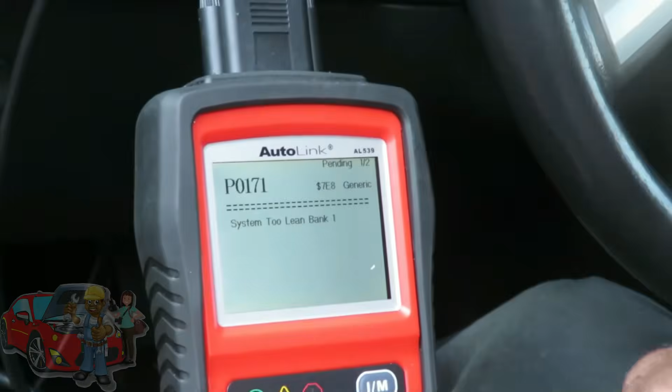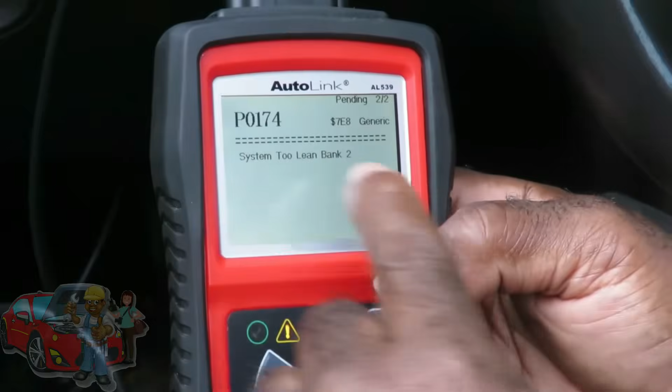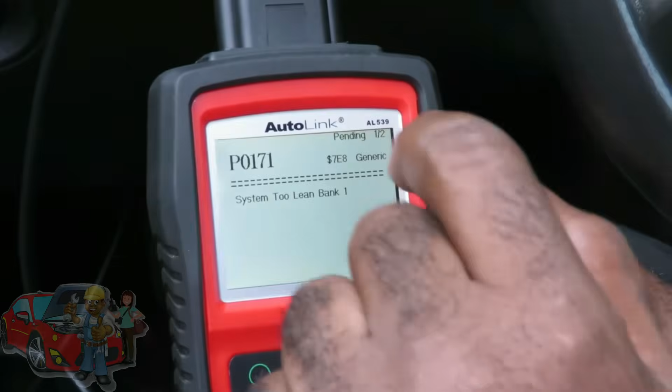We got a P0171, one of two, and a P0174. P0174 is System Too Lean Bank 2, and 171 is System Too Lean Bank 1. Alright guys, I'm going to quickly go over this and explain to you where these codes come from, why they happen, and what we need to do to fix this. Alright, we'll be right back.

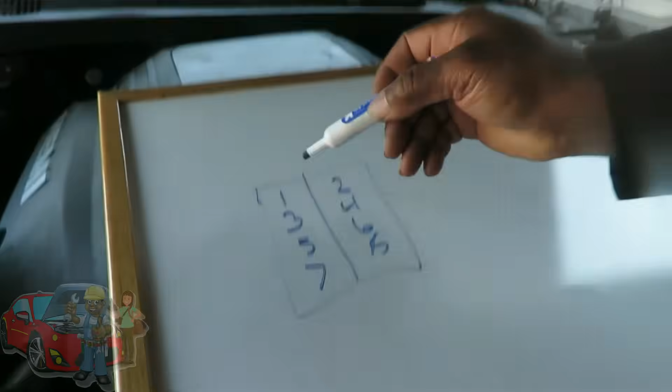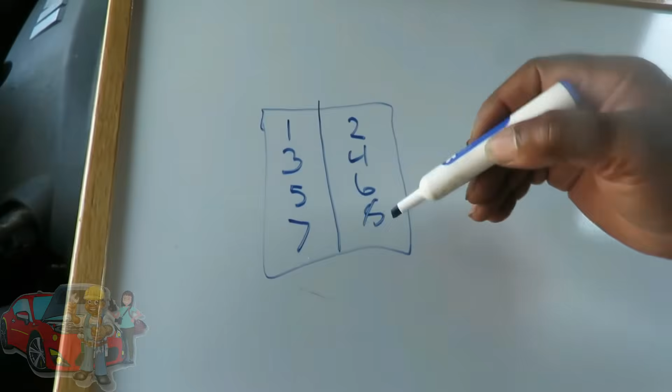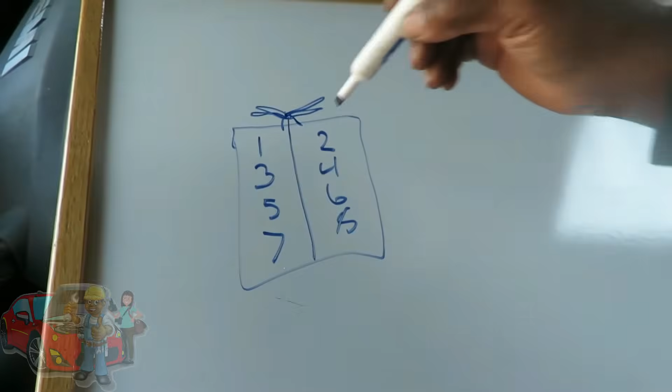Alright guys, what I'm showing you right here is a picture of an engine. This is one side, cylinders 1, 3, 5, and 7. And this side is 2, 4, 6, 8. Matter of fact, to make this legit, let's put a fan on the front. That looks good, like a flower though, and that's for the front of the engine. So this side is considered bank 1, and this side is considered bank 2.

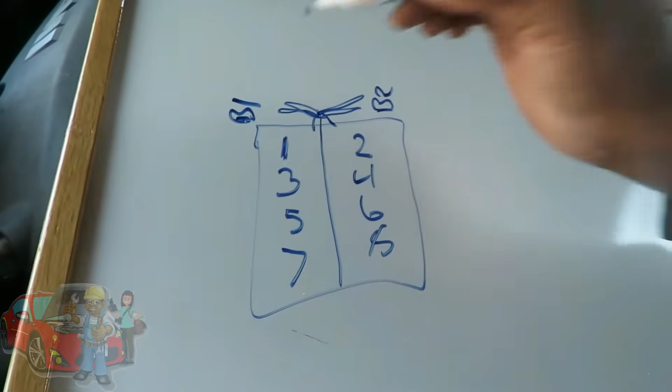Now let's see what happens. Now, is that the way it is on this engine? Well, I'm not sure which side is bank 1 and bank 2, but this is for your explanation. That's wherever cylinder 1 is, that's bank 1. So if cylinder 1 is on this side, this will be bank 1.

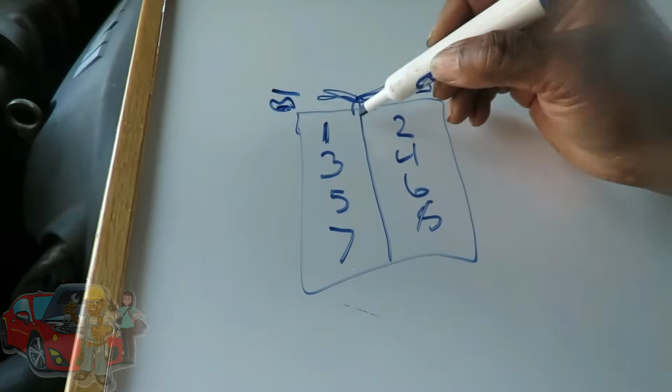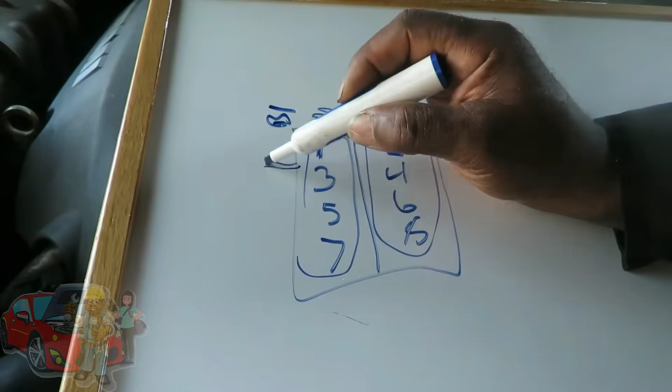Alright, let's see how we're going to explain this real quick, guys. Make this look good. Alright, now on this engine you got your intake manifold, you got your oil dipstick tube, you got your valve cover gaskets, and all that. All that should be sealed off. And actually, some of you guys, if you notice, if you pull out your dipstick, you're going to see a little O-ring right there. That's to stop air from coming out of there, because that can contribute to 171 or 174.

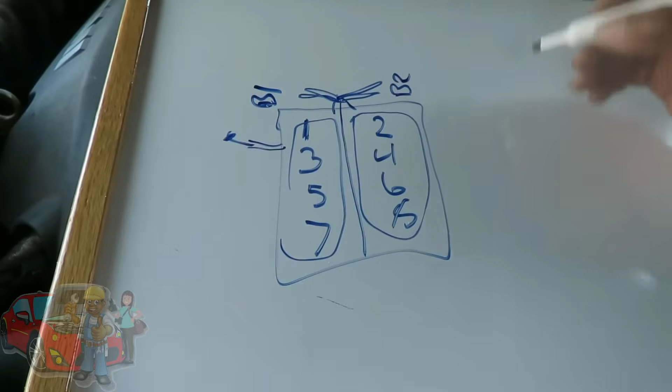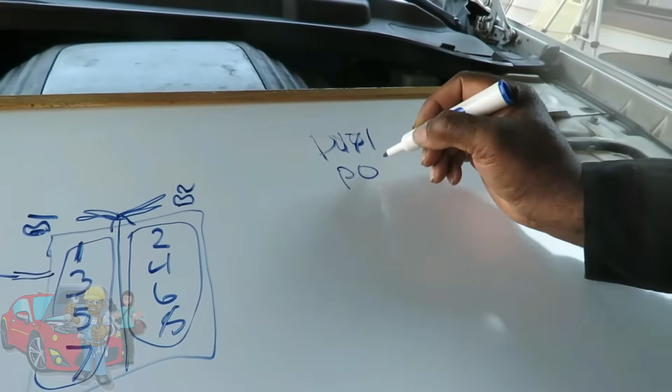Now, 174, that's right. So if you got a P0171... I'll make this one better.

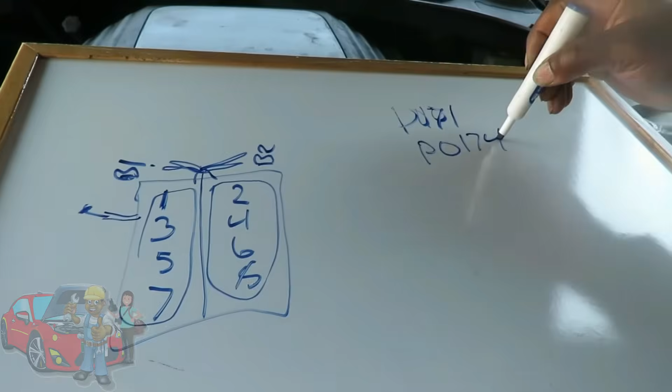171 is a leak coming from bank 1, and 174 is a leak coming from bank 2. When you get both of them together, that means you got a leak somewhere that's affecting both banks.

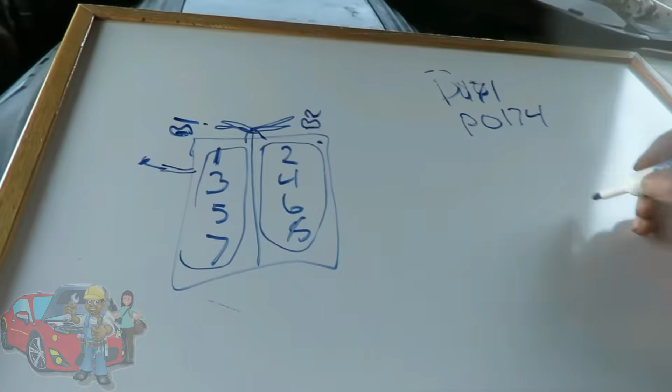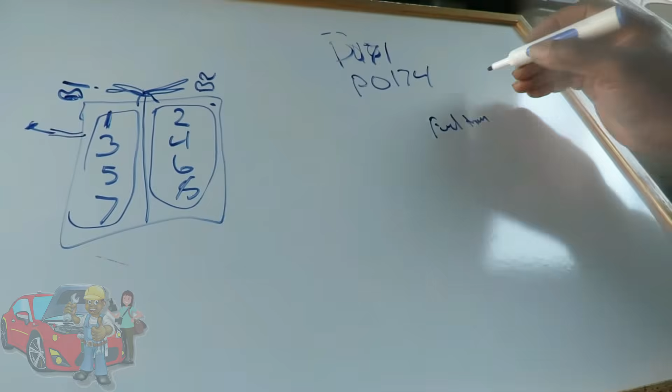Now, what does this mean? Your computer has what's called fuel trim. Don't even worry about the name of it, but what it does is monitor how much air and gas is coming into the engine, and the computer compensates for it. It tries to keep both of them, the fuel and air, at the same level.

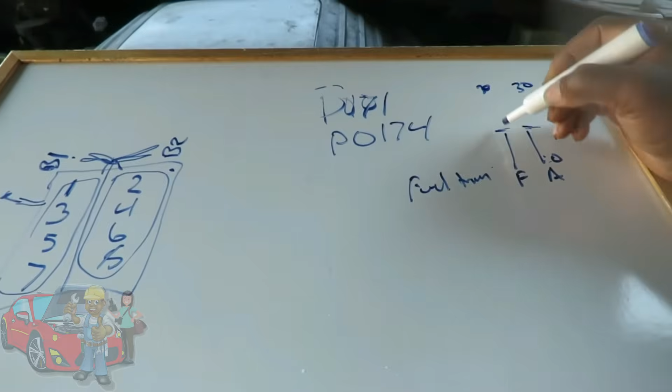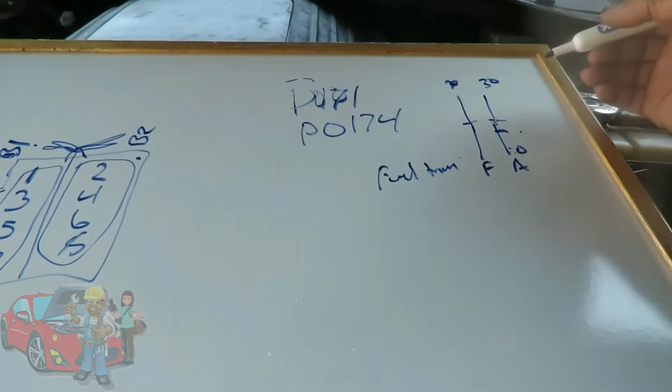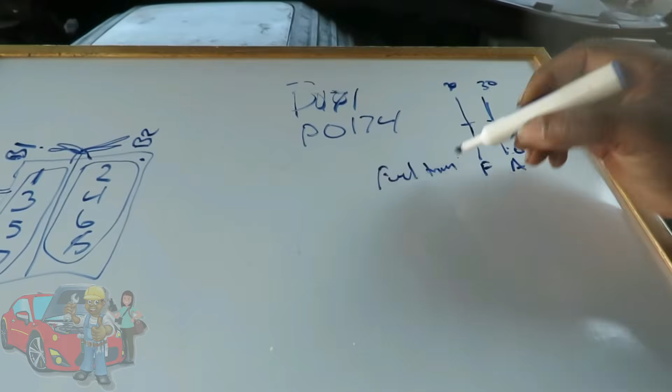Now, if you have an air leak over here, let's say if this one is running from 0 to 30, and this one's running from 0 to 30, and let's say at idle it's measuring right here. As you get an air leak, say if you pull out the dipstick or have a valve cover gasket leak or a leak on the intake manifold, you got more air coming in. So now that meter rises. So what the computer does is give the car more fuel to keep them even. 30 is the limit.

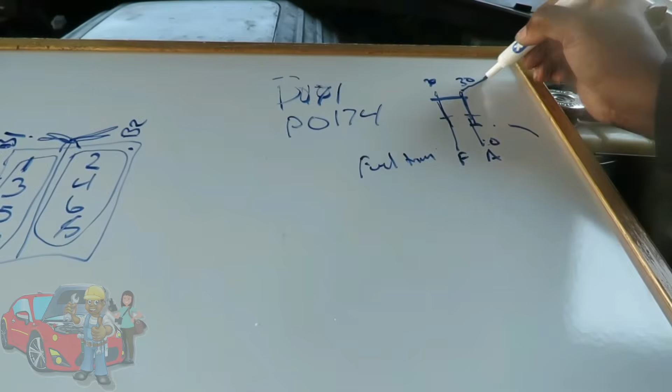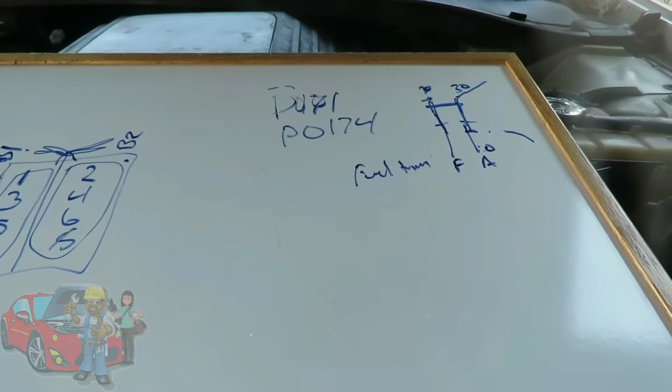So if you got an air leak that's going past this 30 mark, the computer comes up, but it can only go up to 30. And it says, wait a minute, I still cannot get this to even out. Bam, we're going to trigger that code. Any questions on that? No.

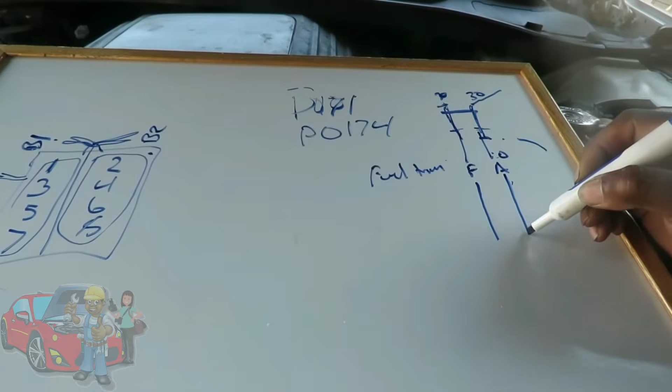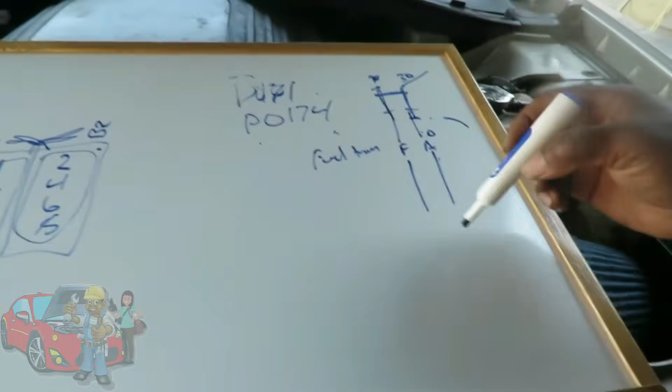All right, now you got the other way, guys. Going the other way is, I think it's 172. 172 and 175 or 176, I don't know, which is going the other way. If it senses not enough air or too much fuel, it tries to equal it out by the air. Then you get a different code.

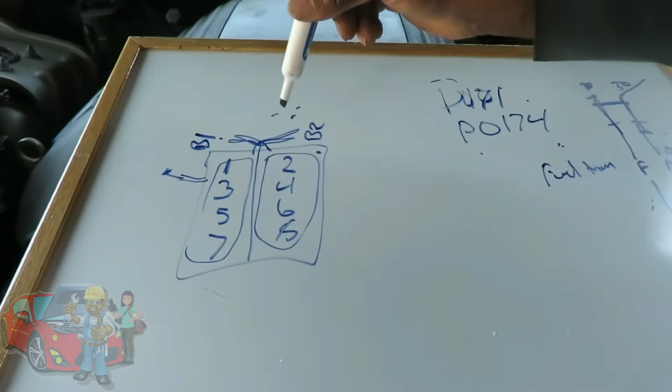So our thing is, now we have a problem with both cylinders here. That means we got so much air coming in from somewhere, it could be a vacuum leak, something. So much air is coming in through this engine that the computer can no longer compensate. So the first thing we want to do is take off the cover and do a visual inspection. Get this out of the way, we're going to pop this cover off.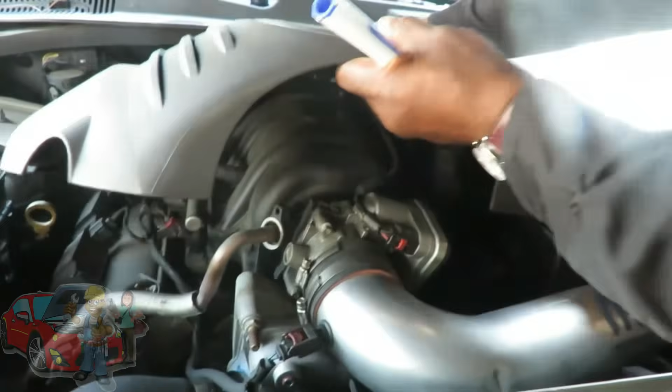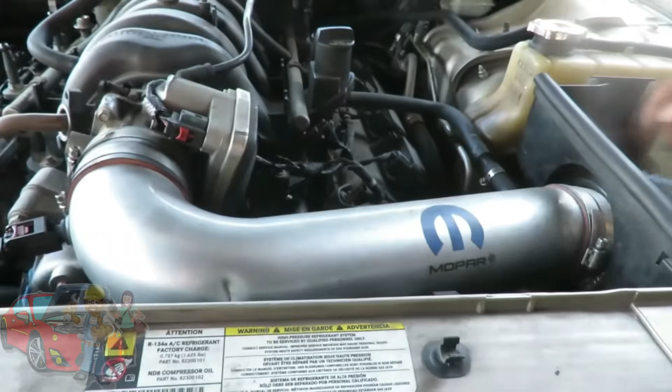What we're going to do is go around and find air leaking anywhere. Now, if this one had a mass airflow sensor in between here, you would want to check any kind of air leak from this point going to the engine. This one doesn't, so even though this is off right here, that's not going to cause a problem. It's got to be a leak from here on out. So how do you find an air leak?

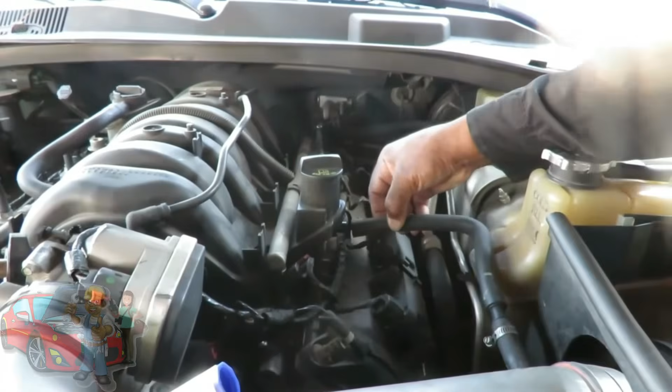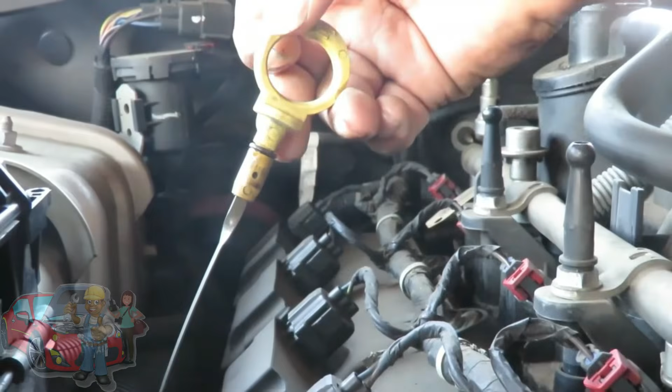Sometimes it's very easy. What you got to do is go around and check all the hoses. That's a little bit loose, but that's not really going to cause it too much. And here's the oil dipstick, and that one wasn't really pushed in all the way. Actually, there it is, like I was telling you about. See a little O-ring right there? If that O-ring is dry rotted or broken or off, you're going to get an air leak coming in, which the computer's going to try to compensate for. But that wasn't in there all the way. Now it is. But will this affect both sides? Yeah, it's going down to the engine, but it would. So we're going to be looking for an air leak that's affecting both banks.

I have a question. Okay, oh no, never mind, never mind.

Okay, so the first thing we're going to do is grab a light, and we're going to look around and see if we can find some leaks. Let me grab a light, and I'll be right back.

All right guys, what's good about this engine is it doesn't have too many vacuum lines and all of it. The only thing I don't like about it, it's got a plastic intake manifold, and the gaskets sometimes suck. So the number one thing right here, in the back, we have our brake booster, and here's a main vacuum line that's going to the back of the plenum. You can't see it back here.

I'm just... oh, you might be able to see it on this side. You see where my hands are? Okay, it doesn't feel loose or anything, so that's good. Any kind of vacuum lines connected to this intake, we want to check, any kind of oil leaks, anything. And right now, that's kind of dry rotted. No, this is dry rotted, and I know if I move this it's going to break. So I'm just feeling around for any cracks, and I do not see anything.

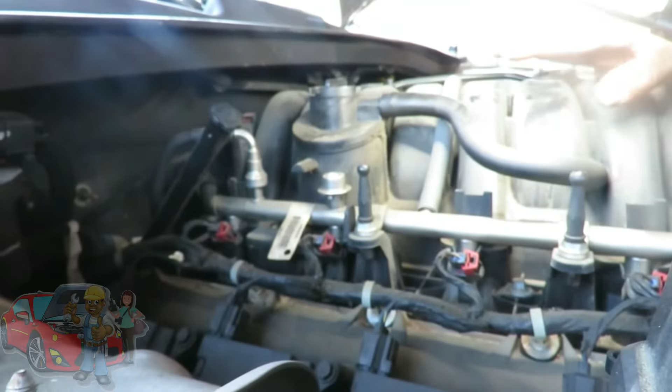Now this is where you come across a problem, guys, because for a DIYer, you're going to have to either take it to a repair shop to have them do a smoke test. And what that is, they'll blow smoke through the entire system, and any kind of leaks will come up. There's also cheaper ones that you can buy online. I heard of people actually making smoke machines at home, which is pretty cool. Wish I would have seen that before we spent the money on buying one.

All right, so we visually do not see any kind of leak. So what we're going to have to do is a smoke test. So let's get our smoke machine, get everything set up, and I'll show you what we're going to do, and we'll be right back. All right guys, let's get ready to hook this up.

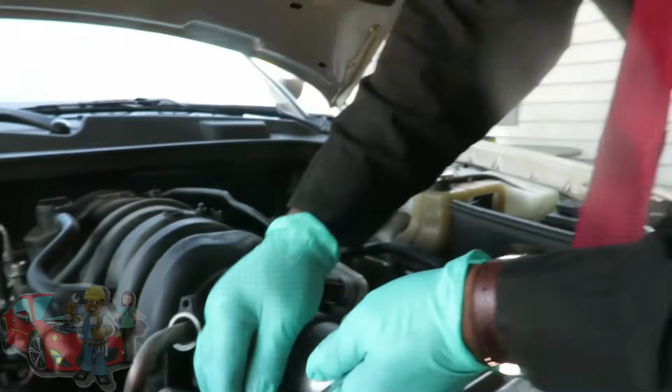First thing we need to do is get us a flat screwdriver. You know what, we're going to unplug our air temperature sensor. Loosen up this clamp. Take this off, because we need to block that off.

Wow. And we're gonna introduce our air through here. Man, that's kind of... we need to push that on, make sure it's tight before we do that.

Now, usually, a lot of times what I like to do is go through the brake booster. But sometimes your air leak can be coming from the brake booster, so that would kind of suck. So we're going to do it right from here.

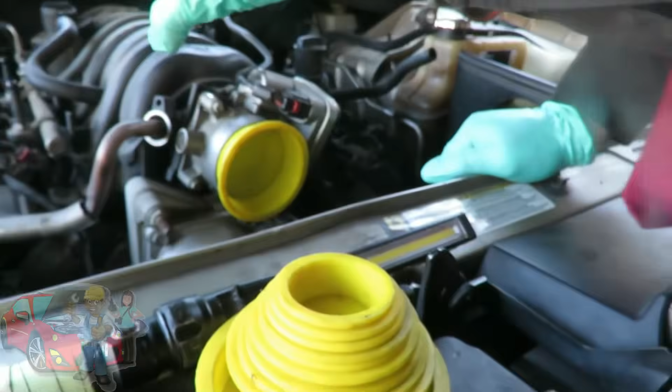Alright, we got our smoke machine over here. And what we're going to do, first we got to hook up our power, going to the battery of the vehicle. And then we got our caps here. We're going to find one that will plug up. Oh, that right there, that's good. And plug that off so air won't leak out of there. So let's get our machine hooked up, hook up our air line to it, and get ready to do a smoke test. We'll be right back.

Alright guys, let me explain to you how this is going to work. Here's our little nozzle that's going to shoot the smoke out, and here's our trigger button. Now once I hit it to trigger it, trigger button - see the smoke coming out of there?

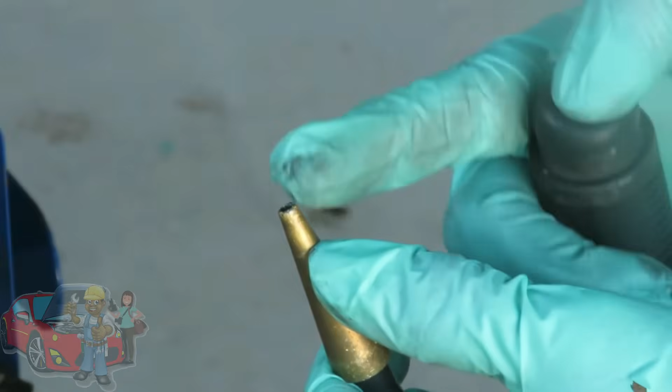Now what's going to happen is that this machine is going to blow this smoke all throughout the intake, and we're going to find out if there's a leak. We look for leaks from the smoke coming out.

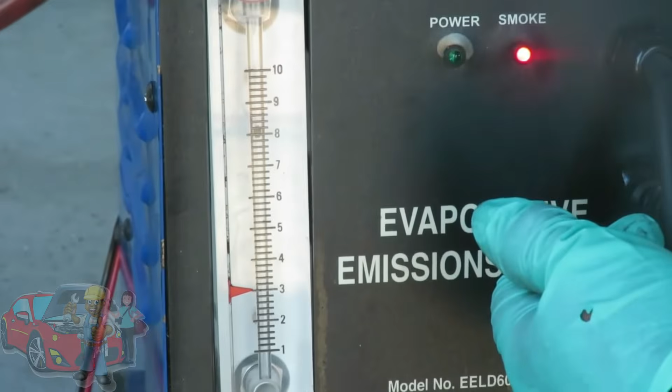Now, this machine has a little ball on it right there. So now we'll get this together. When I hit the button, notice the ball goes all the way to the top. As the leak closes, that ball starts dropping down. As I close my thumb off, all the way till there's no leak.

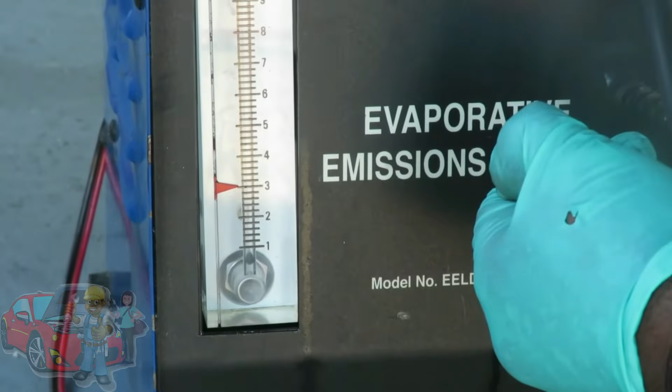Go back up. Alright, now that we got that, we're going to take this, stick it into this hose right here. We're going to make sure it's firmly into there. Let's get our trigger, and let's go over here. First we're going to go over here and watch the machine. Alright, so let's click it on.

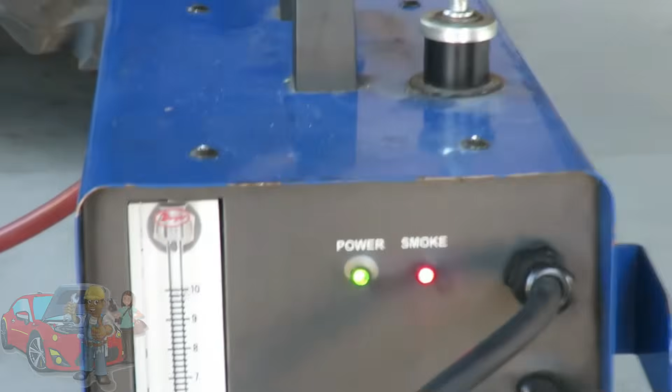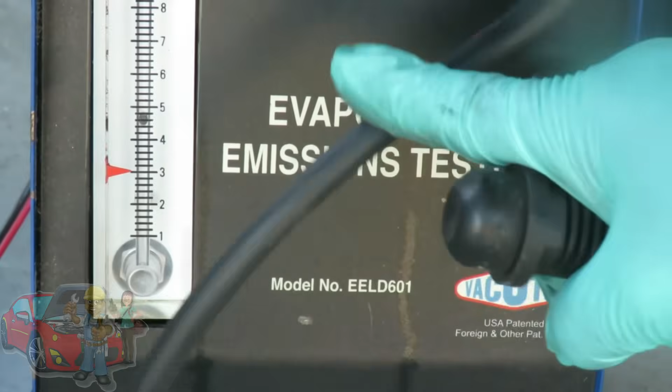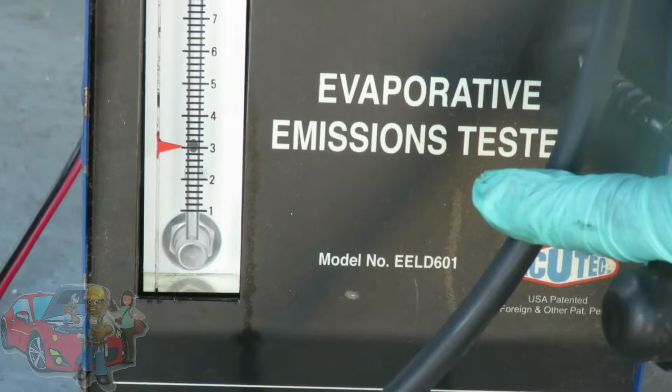And as the system builds up pressure, you can see that ball continuously drop down. And it looks like it's hanging out. Oh no, it's still going down. Is it hanging out there? Well, looks like it's still going down.

Let's go over here to the engine and look around. And we look for any kind of smoke coming from anywhere.

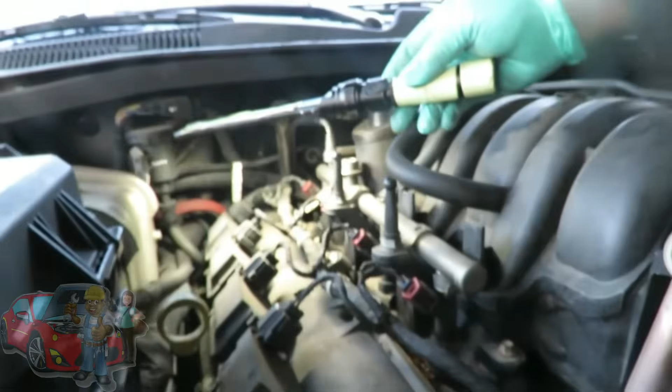Is it only gonna be under the hood? Can it be anywhere else in the car, or under the car? If there's like the evap system, if that wasn't working right, it would come out of there, but we would get an evap code. But we're not, and we're not seeing no smoke.

And this is, I'm gonna show you what I mean. But we're just gonna remove this cap. See that? So let's close that back up. And we're going to let the system build up pressure again.

Now, again, the funny thing about this is that when we first started, we noticed that our oil dipstick was not pushed down all the way, and that can cause a problem. Let's see.

No, I didn't. Now this is what I mean by the oil dipstick - the oil dipstick was partially up. So you see that? Now it was down there like that. But even down there like that, it's not leaking. I'm going to see if it does - see if it builds up pressure.

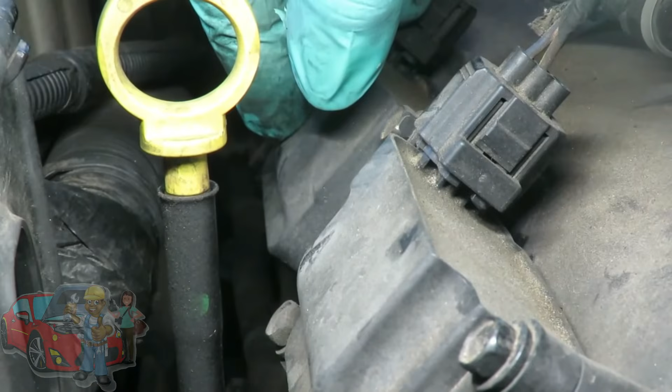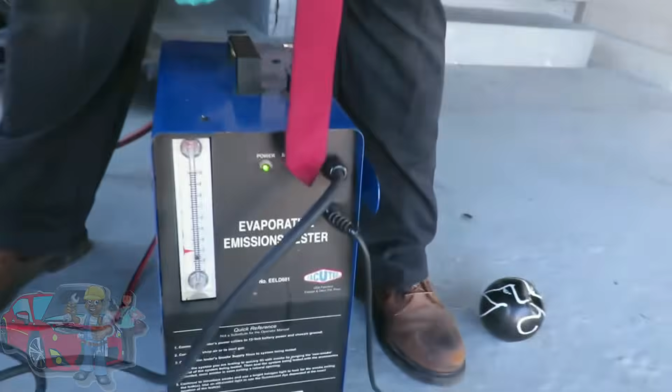Let's go check out where our machine is at. Hanging on about 3. It's tiny, it's a small leak somewhere. So we just gotta let the machine stay up here until we can find something. We'll be right back.

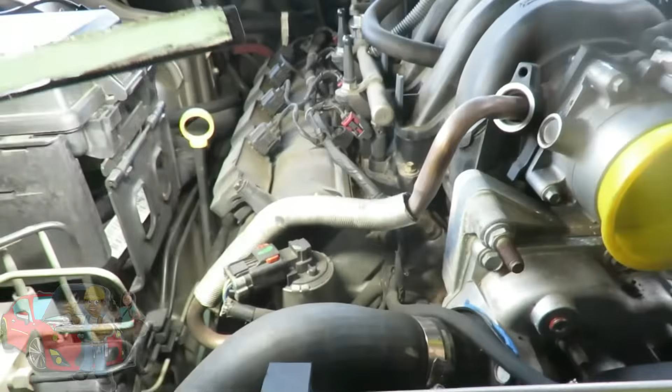Alright guys, look at this. Look at all this smoke coming out, and it's coming from the EGR valve. The EGR valve has a diaphragm and a pintle inside that should be closed right now. No air should be leaking whatsoever. And because of this, the engine should have a little rough running condition as well. This is a major vacuum leak right here.

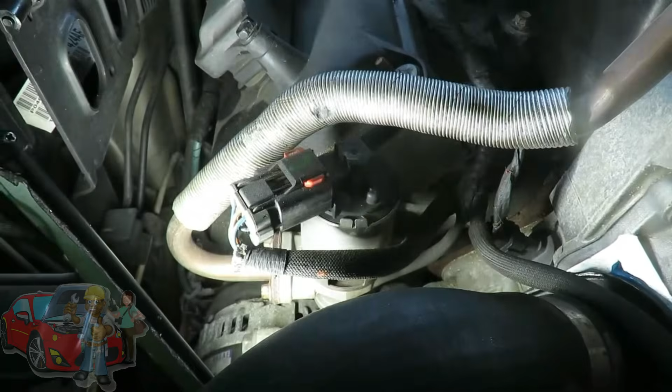And actually our meter went down to 2 and then it just started coming back up right now. Let's look at our meter - that's high.

So we know we got a leak at the EGR, that's one. Now what we're gonna do is go beyond the call of duty here. I'm gonna take off those two bolts, disconnect this line, and try to plug this line up so we can eliminate the EGR valve and continue on with the smoke test. We'll be right back.

Alright guys, first let's unplug it. Got this little safety tab right here, we just gotta back that tab up. Just like that, squeeze the connector, the little tab in towards the connector, and unplug it. Get it out of the way.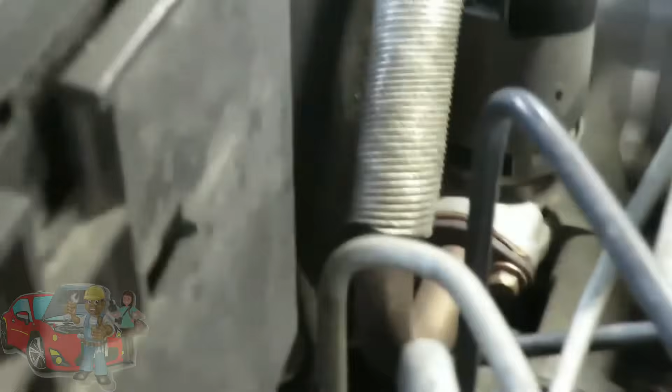Now, it looks like it's held on by two 8mm or 5/16 bolts. I'm going to use an 8mm deep 1/4 inch drive, and go in here. Get this bolt out first since it's the hardest one, then I'll go over to the other bolt.

Be right back. Alright guys, we're taking out the second bolt. You'll notice there's a gasket between there, so we want to make sure we don't drop that gasket.

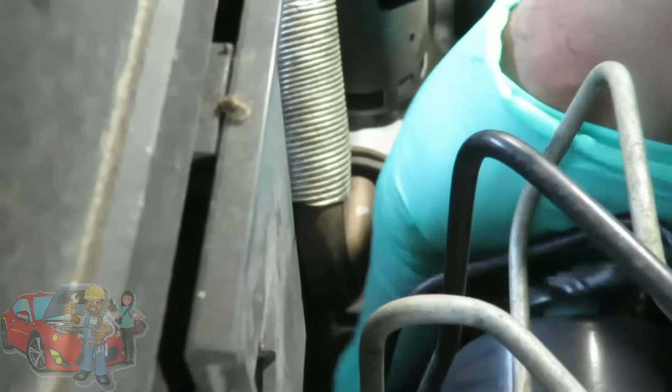Of course I'm going to drop the gasket. Watch.

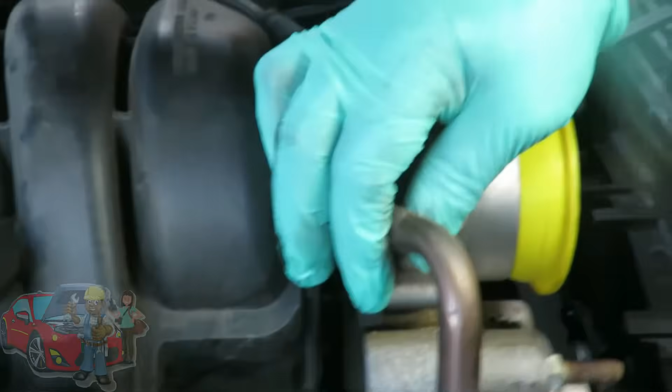Okay, now up here it just pulls out of the plenum. Oof, what is up with that? It's carbon, and there's our smoke coming out.

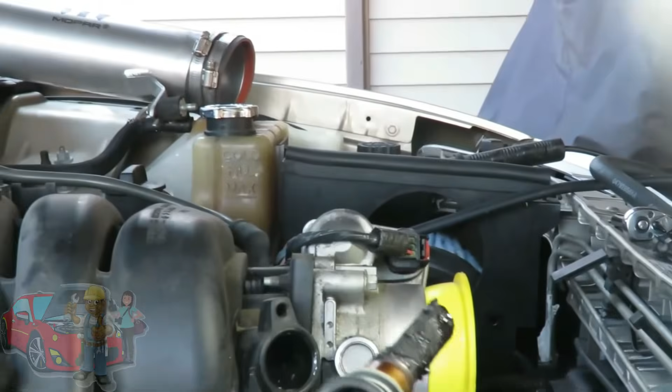Now what we're gonna do here, guys, let's keep this out of the scenario, and we're gonna get something to try to plug up into there. So let's find something and we'll be right back. Alright guys,

Siri recommended we use this piece. That was cool, see how she's thinking? I like that, I like to have somebody working with me that can think. So what we're going to do is... too bad Billy Bob's coming back.

Yeah, we'll wedge that in there, and we got the end of it plugged off. And let's hit the machine, see if...

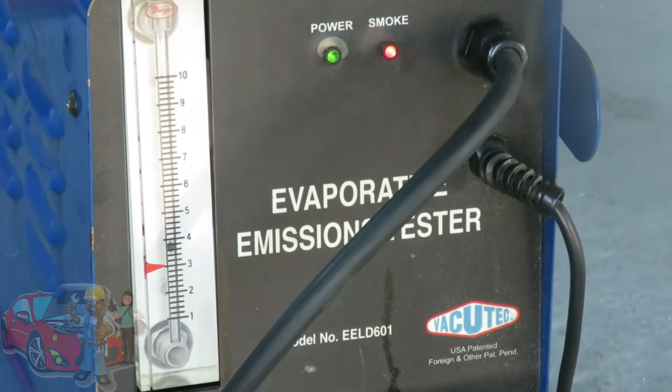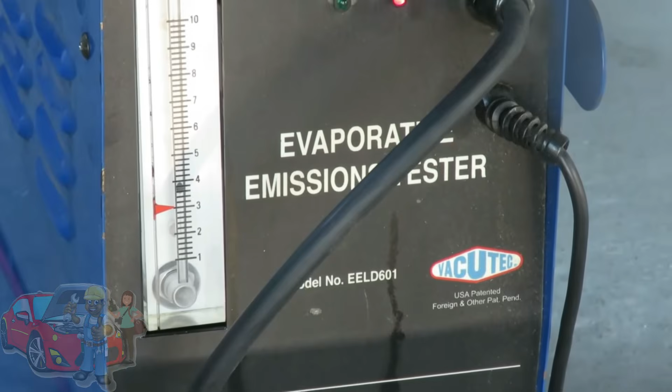Looks like we still got something going on here. Let's go up here and look around. So we're going to let this run now for a little while and try to locate another leak.

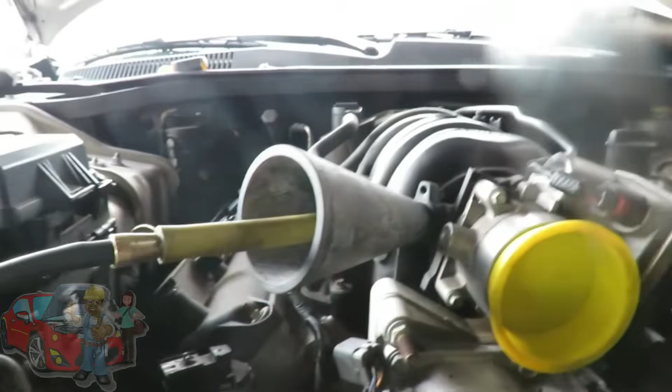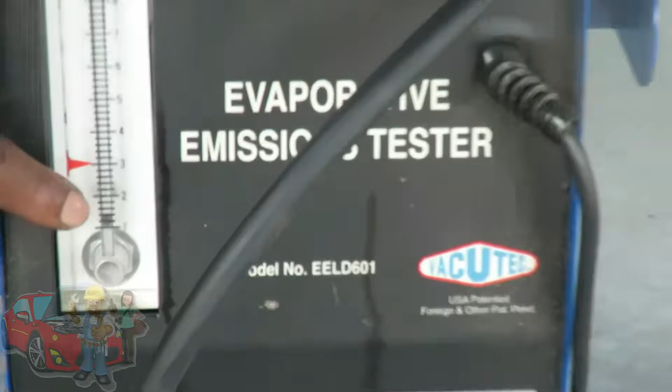We'll be right back. Alright guys, we had a little mistake a minute ago. We had taken the adapter out and put a spark plug in here because it was leaking through here, but we couldn't see it, and this thing was bothering the mess out of us. So we stuck a spark plug in here, and we still got an adapter hooked up into here. And as you can see now, we're way down there, look at that. No leaks whatsoever, and that's with the EGR valve out.

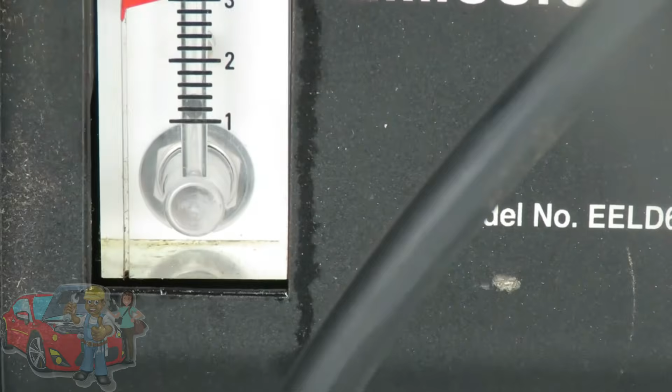So what we're going to do now, we're going to put the EGR valve back in and retest this and see if it comes up. We'll be right back. Alright guys, we got it going back in. It's kind of windy out here.

Now here's the weird part. We saw in the beginning this thing was smoking like crazy out of here. I don't know if it's because when I put this together, I hit it and the pintle opens. Some of you guys know what I'm talking about. The pintle opened all the way or something, maybe it was jammed up a little bit. But look at this.

There's hardly any smoke coming out of here now, and trying to see if we see some. We saw a little bit, I see a little bit.

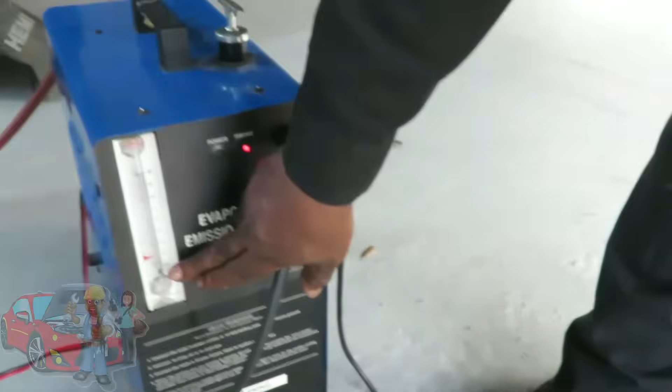But if we go over here and look at the machine, look where we're at, we are way down there. And we know, we saw in the video, that it was leaking out of here a lot. So as I said, maybe when I was taking this off, maybe because I was up against it and hit it, the pintle was open a little bit or something, or whatever, or I have no idea, but it was smoking like crazy. And look at that, it is hardly any smoke coming out there at all.

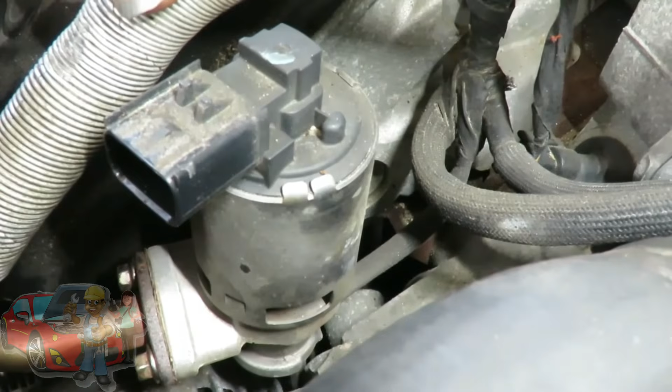You want to say something? Well, they probably think we're crazy that we see smoke, because you can't really see it in the camera, but we can see it. But not like it was before. No.

So, we're going to sit here and call this, tell them it's an EGR valve. And that would definitely give us both of those codes. Alright, we'll be right back.